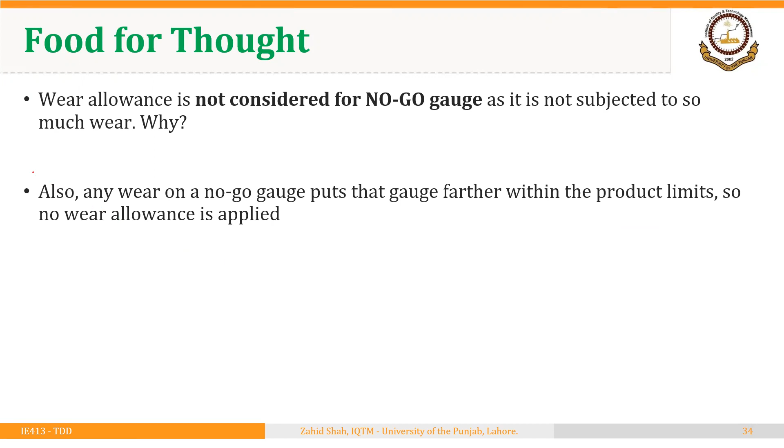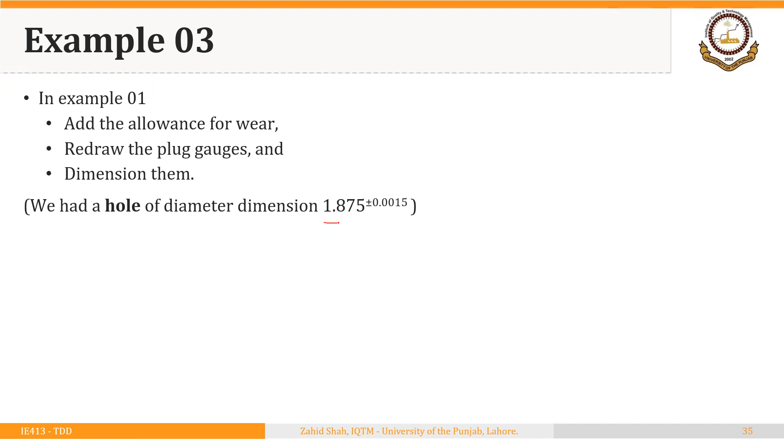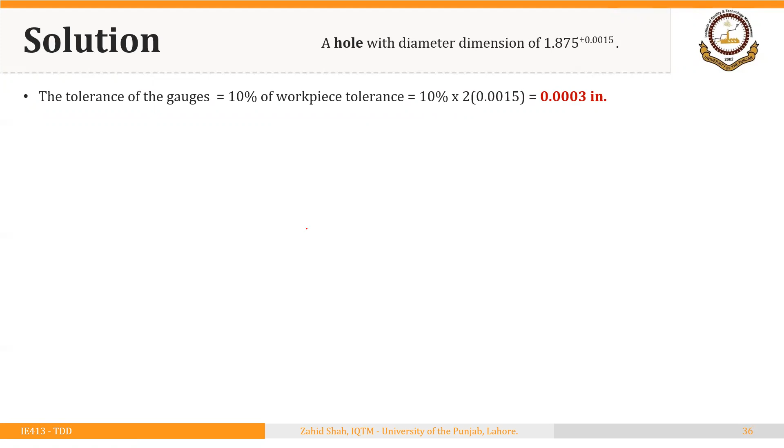So let's solve the same example, that is example 1, but here we will consider the wear allowance as well. So we had a hole of diameter dimension 1.875 plus minus 0.0015. The tolerance of the gauges, if a certain class of the gauge is not given, is equal to 10% of the workpiece tolerance. So that was found to be 0.0003. Now the wear allowance is 5% of workpiece tolerance. So that will be 5% of 0.003.

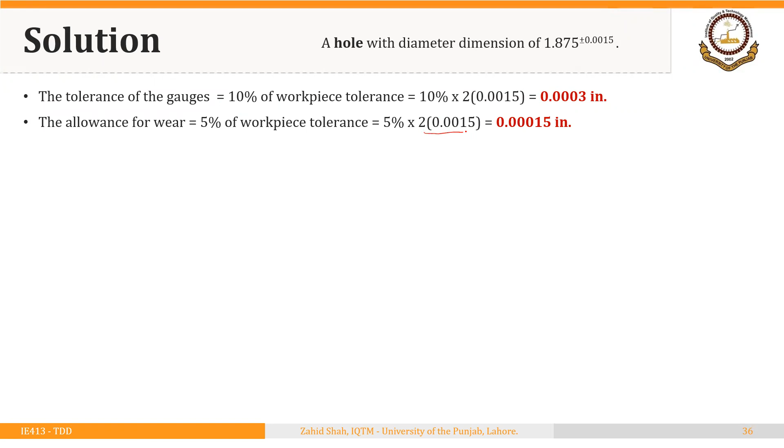So that will be 0.00015 inch. Now the basic size of the go plug is equal to MMC, or the lower limit of the hole. So that will be equal to 1.875 minus 0.0015, so 1.8735. That will be the basic size of the go plug if we are not considering the wear allowance. But if we are considering the wear allowance, then we will add the wear allowance to the basic size of the go plug gauge to determine the new basic size, that is 1.87365 inches in this case.

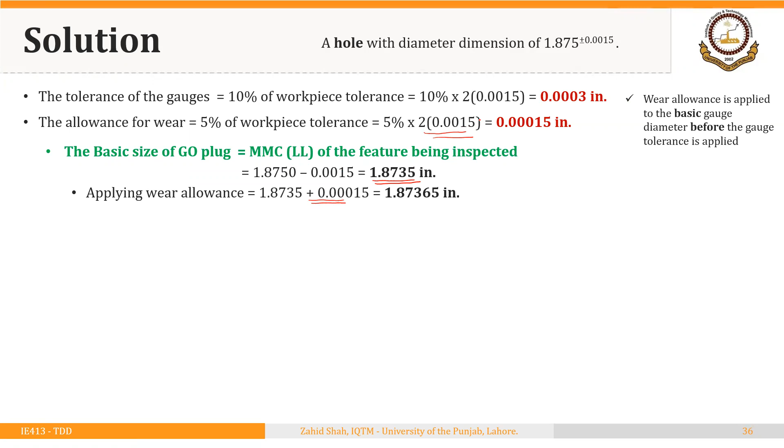So wear allowance is applied to the basic gauge diameter before the gauge tolerance is applied. Tolerance is in the plus direction for go plug gauge as we have seen. So now it will be 1.87365 plus 0.0003 minus 0 because we are using a unilateral system. And the size of the no-go plug will be equal to LMC or the upper limit of the hole. So that will be 1.875 plus 0.0015, that is 1.8765. The tolerance is applied in the minus direction. So 1.8765 plus 0 minus 0.0003.